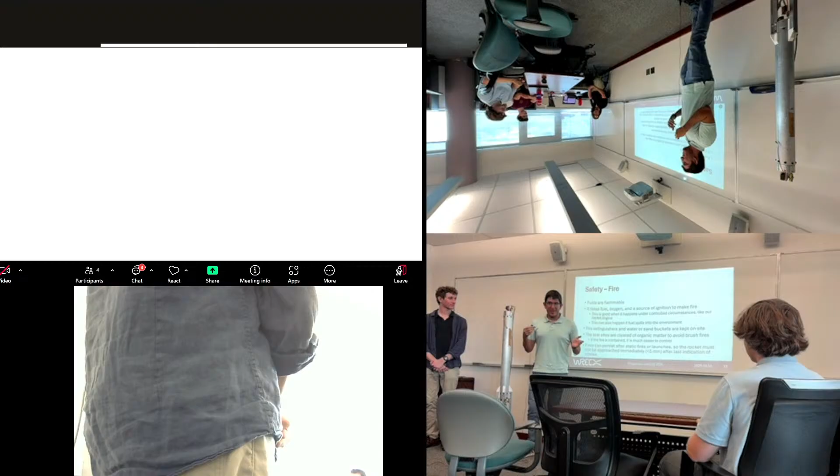Fires. Fires are really scary. Don't want to burn anyone. And we also work with oxidizers and fuels. They will combust by the fire. Hence why we're always staying away.

On site, we'll always have water and fire extinguishers. We'll never do any sort of testing without these two, and they have to be easily accessible. So before we start a static fire, we have our SOP, our standard operating procedure, on who's going to be in charge of dealing with the fire extinguishers and the water. And on top of that, every single member who is at the static fire will know how to use this equipment just in case the person who is in charge of it isn't able to for some reason.

All right, nitrous oxide. We can't have oxidizers near fires. Oxidizer and fuels, not a good combo. Kind of builds off of the last one.

So that's just more information about why nitrous oxide is dangerous. I'm pretty sure most of us in here are familiar with the concept.

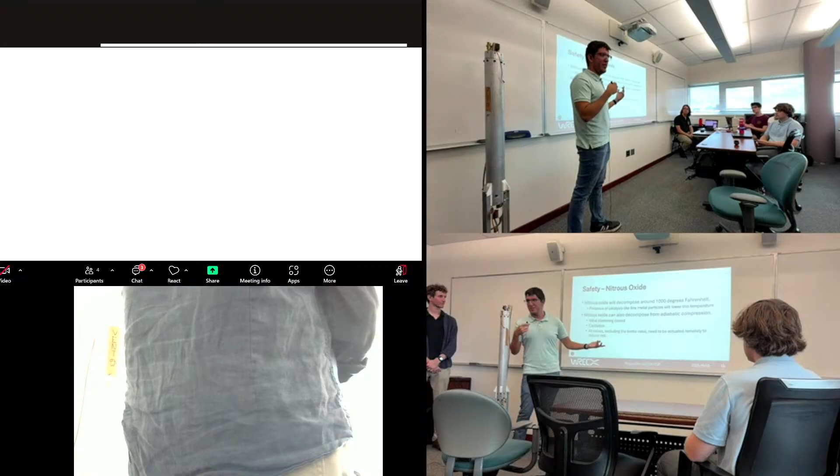Cool. So, BLEVEs, boiling liquid expanding vapor explosions. It's not the highest risk with our system, but it's still risk we want to take into consideration. We are a laboratory. It is dangerous by nature.

Cool. Fuel air explosions. This is caused when fuel vaporizes into an appropriate volume of air, reaches an explosive threshold and gets ignited. We need to prevent this at all costs. So that's why we actually have a new position called the safety lead.

The safety lead is actually in this room. His name is Sam. He's in the back. He was just elected today, so he wasn't put into the slides. But the safety lead's position, he's making sure that whenever we're doing a static fire, that the people in charge are doing the right things. So while let's say Chris is trying to ignite the rocket, he's going to have his own separate checklist that is exactly identical to his, making sure he's not skipping through all these things. Because we need everything flowing as it should, when it should.

Electrical hazards. Just like with anything nowadays, there's wires, electricity's flying through it. We need to be really careful about this. Electricity can ignite things. You don't want anything prematurely ignited.

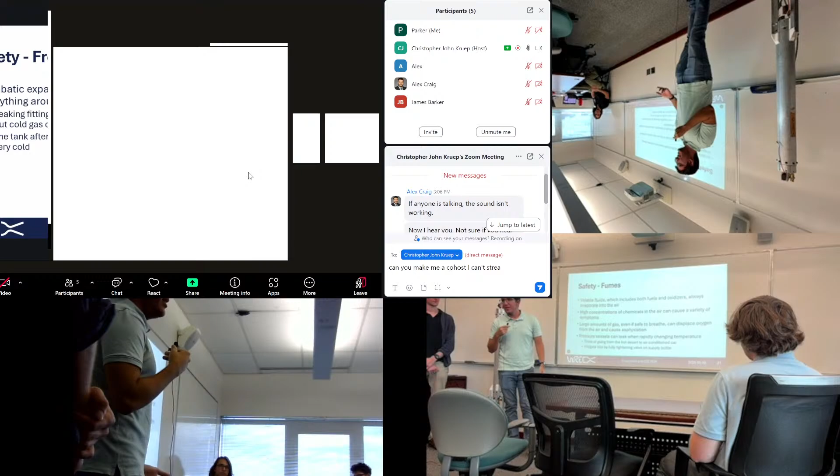Fumes. So for this, we are trying to create an SDS, safety data sheet, on how to deal with all the chemicals within the lab. We want to know that if fumes get into the air, how we're going to evacuate the premises and how to deal with them properly. Since no one in the club is properly certified to deal with fumes, this is why we'll call a certified person, or have someone by who does know how to deal with these chemicals. Any questions about safety?

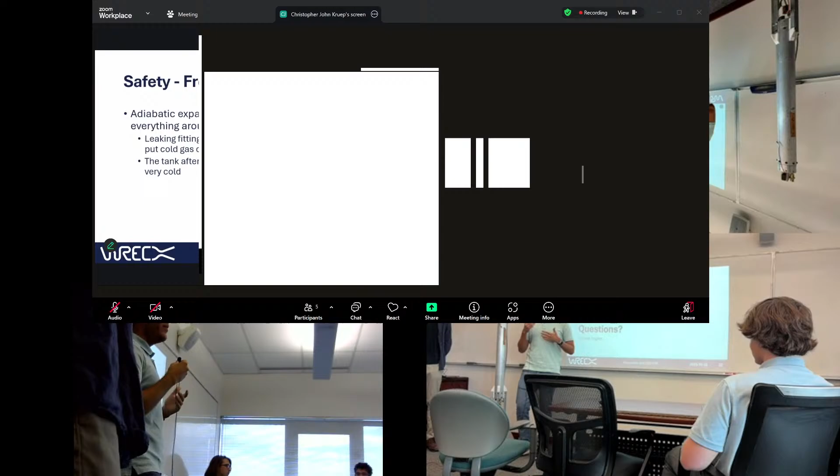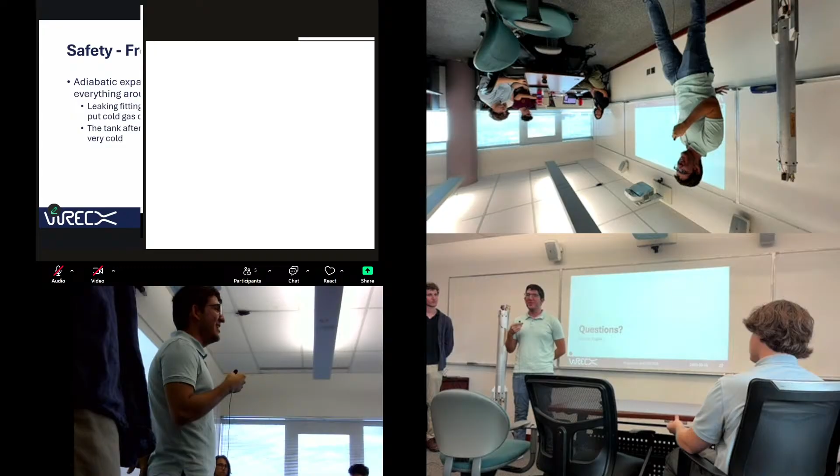Oh, sorry, yeah. So I know it's probably already looked over, so I'm just curious. There's different classes of fires, A, B, C, D. Right? Do you need to know how to identify them? Yes. Most members in the club are actually OSHA certified. Wow. So that's been a real plus. So some people already know how to classify it. And it's also something I'm planning to teach at a future general body meeting, probably the next one. Like you said, fire classification is really important.

I'm not sure, honestly, but it could be started in January. That would be interesting. I know they have that. And also the competition in May. In January, yeah, because that's supposed to be our first static fire. You're going to the symposium in January. Yeah. I'm not quite sure on the static fire, but I'm pretty sure we can figure out more stuff. Okay, and then we could talk more about that.

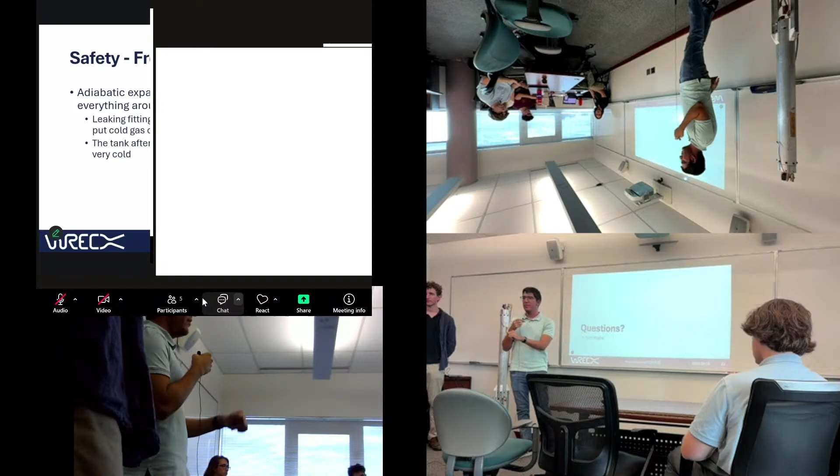Do you guys have any safety certifications you give to students? Like, are there any courses? So we don't currently have our own safety certifications, but that's something I was trying to look into. Maybe try to get more people certified in OSHA 10 since it's a relatively easy thing to do. But that's something I want to work with the U of A on to figure out how to get a bit more efficient. But right now, we're figuring out this whole safety thing since it's a brand new position.

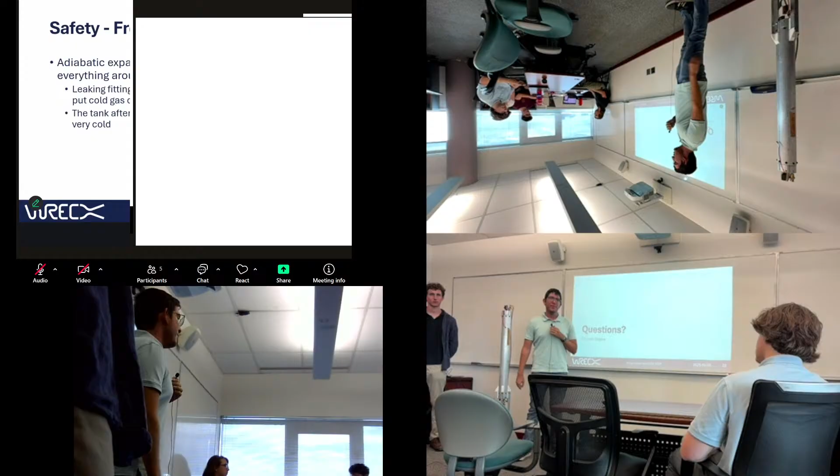Can you describe a little more of the electric match? So yeah, E-matches, that's how we ignite the rocket. Just in case that short circuits, it might go off. So how does it actually work? What I'm getting at is, do you need certification just for that? So the E-match is a very small pyrotechnic device, about this big. To ignite it requires in the range of hundreds of milliamps current, very small. You can even use 5 or 9 volts to do so. When it does ignite, it's just a small pop. It is technically not safe to be super close to, but it's very small and contained.

They're used to ignite typically much smaller solid rocket motors, and the same ignition system will be used in this rocket, more on it later. Very small, and that'll be in here. So when we're handling those, we keep the end leads shunted so that any static that builds up as we're working in the heat in the desert, wherever we are, will not go through those leads to ignite them, because with that low current, they can be sensitive. Otherwise, they have protective little coatings on them, and we keep them in a secure box while in our club area, to mitigate risk.

Good. I was hoping you'd refer to grounding and shunting, things like that. So do you have to take special training in order to handle those? As of this moment, no. You can just buy them online, and they just get shipped. Is there a class that helps, like when an organization classifies them? In my knowledge, no. I haven't seen any classes on it, because you can kind of just buy E-matches anywhere. We get ours off of Amazon and CS Rocketry. I think it's because they're very small. I've seen higher classes for bigger solid motors, but even the little solid motor we put in there is not classed as an explosive for transport. Well, would you consider this the first rocket and the second rocket that we've had over the years?

Is this the first? Yes. The Sonoran Wildcat, first rocket, these are the same thing that you see right here. And then you're just gonna completely start off, because I know the rocket has to come back down and slam on the ground. For recovery or for the whole structure? Not for the whole structure, but whenever we launch, we have to bring it back down and land it. Are you gonna set up the landing platform from scratch, or do you have a plan for it?

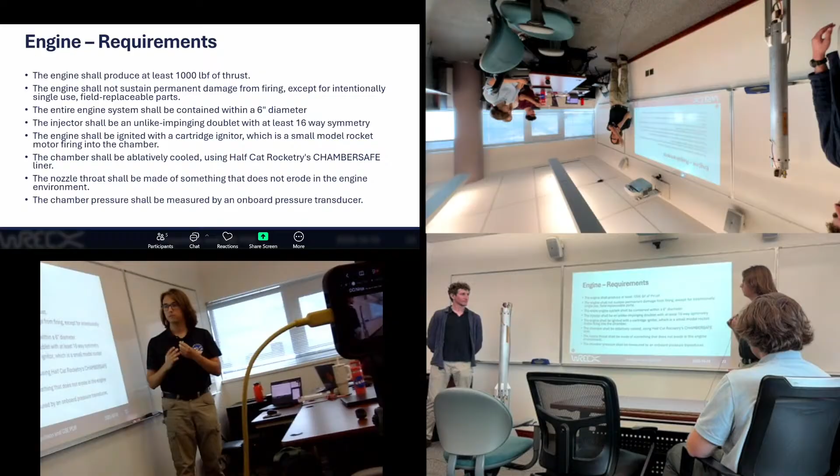Hello, I'm back. Okay, so now we're into the subsystems. As you can tell, they get progressively shorter as the slides go on, but we're starting with the engine, arguably the most important part of the rocket. These are the list of requirements. I'm not going to go through all of these, but I'll go through a couple to explain them. A very important one: the engine shall not sustain permanent damage from firing. We want this rocket to be mostly reusable. There are some exceptions. Ablative liners are the big one because it's the simplest way to make sure the engine doesn't melt by sacrificing some material.

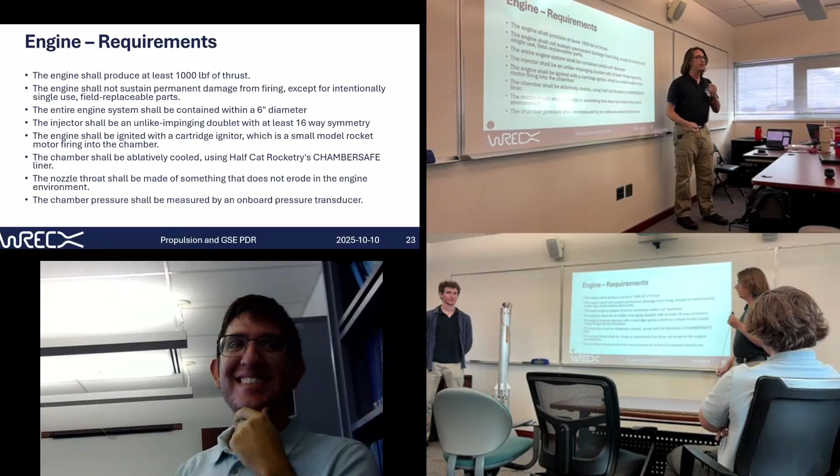Let's see. The nozzle throat will be something that doesn't erode. This is key for how we measure thrust. As of right now, we don't measure thrust with a force sensor, we measure thrust with chamber pressure. And this is good provided you know the right parameters of the engine. One of those parameters is the throat area. If the throat area is changing, then you have a much harder time getting an accurate thrust profile. We'll get into this later, we're looking at either graphite or some kind of alternative. Let's see one more.

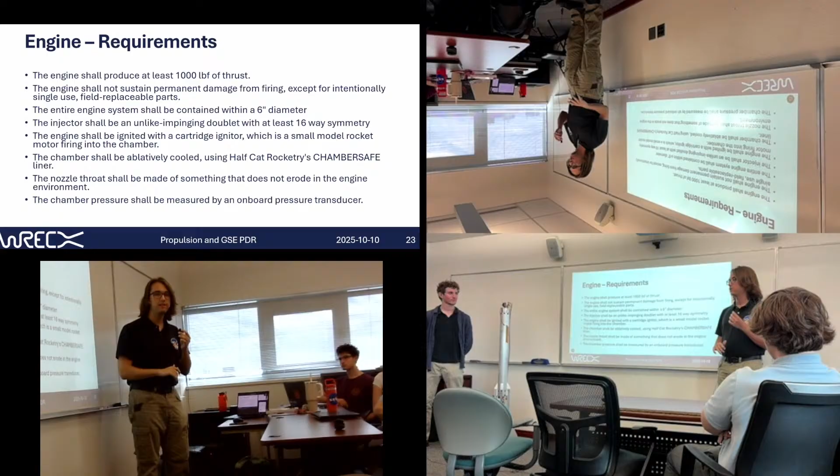The entire engine system needs to fit within a 6-inch diameter. This 6 inches is the diameter we're setting for the rocket. And we need to make sure that nothing sticks out of 6 inches because it will cause challenges for integration and drag in flight.

Okay, so a little overview of the engine.

You can't see this very well. Oh, I'm sorry about that. Oh, actually, could somebody hit the lights? That might help. Yeah. Not much better. That did not. You can turn that back.

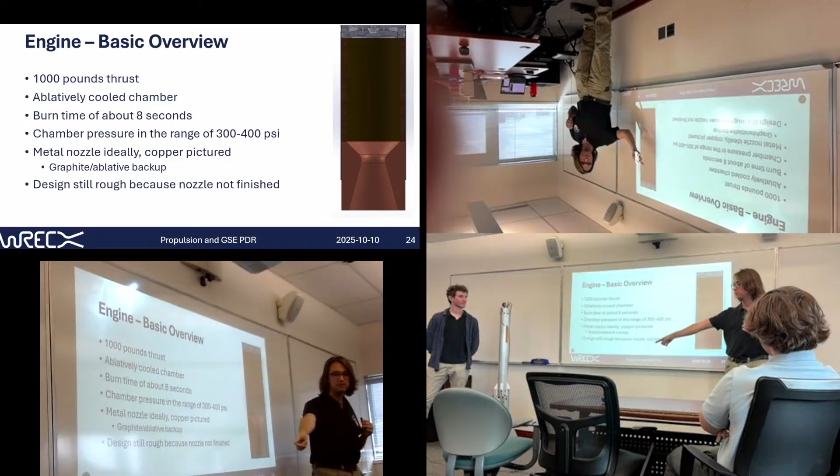So 1,000 pounds of thrust. Again, that's about 4 times what this makes. It's technically higher than it needs to be, but we like a good margin. Ablatively cooled. If you could see this, you would see that there's a tube made of ablative, and it's about 0.4 inches thick, which is quite conservative for our length of burn. Burns for about 8 seconds, but it might burn for less than that if it burns higher thrust. We'll get into that later.

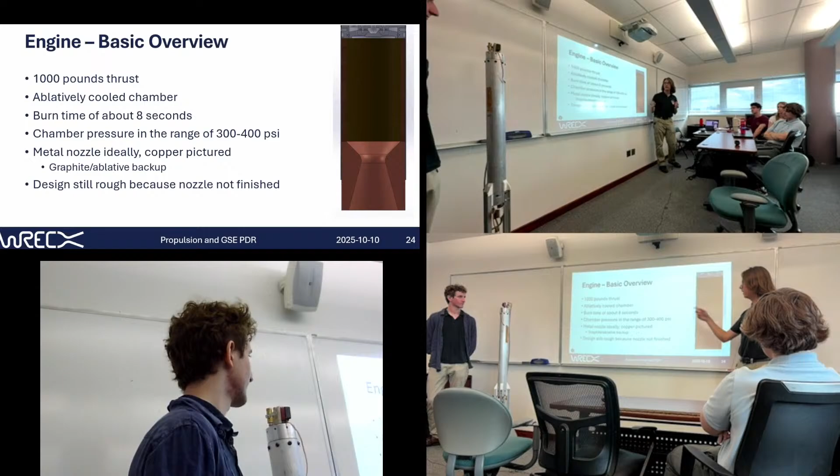Chamber pressure about 300 to 400 psi. This is sort of limited by the properties of nitrous oxide. You can only get so much pressure into the chamber based off of the vapor curve and everything. Ideally, a metal nozzle. We'll get into that later. And of course, this is a rough design. The most finished part is the injector, I would say.

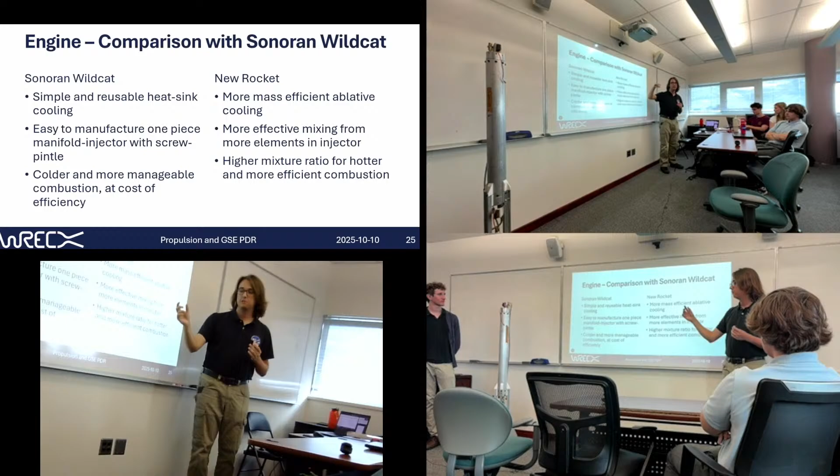So comparing the two, on Sonoran Wildcat, we used a heat sink cooled engine, which means the chamber wall is 1/2 inch thick. And that is simple, it's very reusable, as long as you design it right. But the catch is it cannot burn for longer than it's designed because then it will get hot enough to melt. Heat sink means it just absorbs the heat and distributes it evenly.

On the new rocket, it will be ablative cooling, which is burning away material to take heat with it. So it's not reusable. On this rocket, it was a simple manifold injector combination with a screw pintle injector. It's easy to manufacture, it works pretty well. The new rocket, we're hoping to get a little bit more efficient mixing from an impinging injector with higher symmetry. This rocket burned very cold in the engine as far as rockets go. The new rocket will burn hotter, but hopefully also higher efficiency to get more performance.

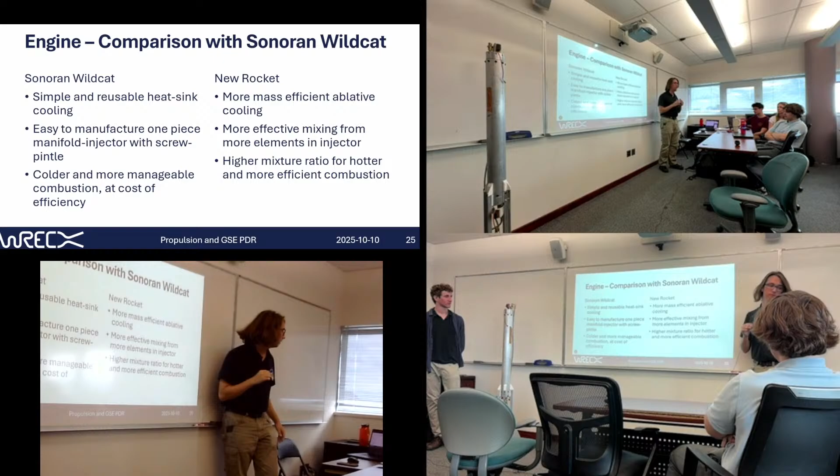So some numbers to back that up. We've already covered this. The throat diameter, you can see it's almost double on the new rocket. The specific impulse might be higher. We've tested to 140 seconds. Specific impulse is a measure of efficiency. On this rocket, that was the highest we ever got. The simulations say 160 seconds, but I'm skeptical. But that's okay. That's why we tested it. Chamber temperature, big difference, 1400 degrees Fahrenheit versus 2600 degrees Fahrenheit.

That's exactly, no way, you can't say that. Never mind, I was gonna say it's twisted, but it's not.

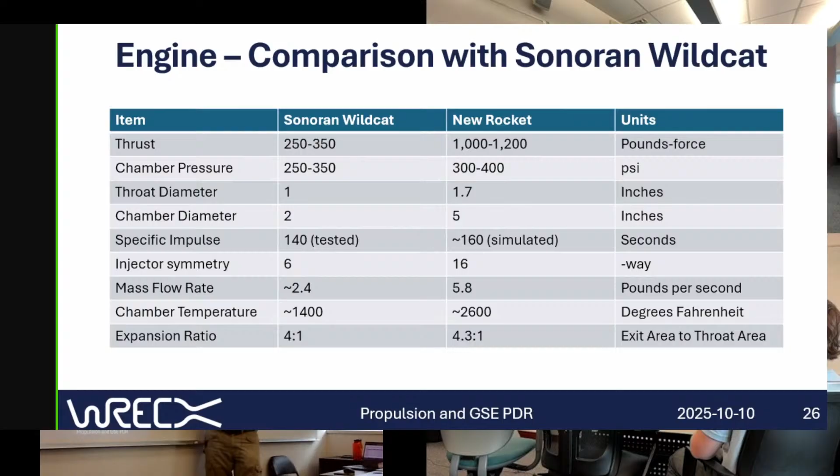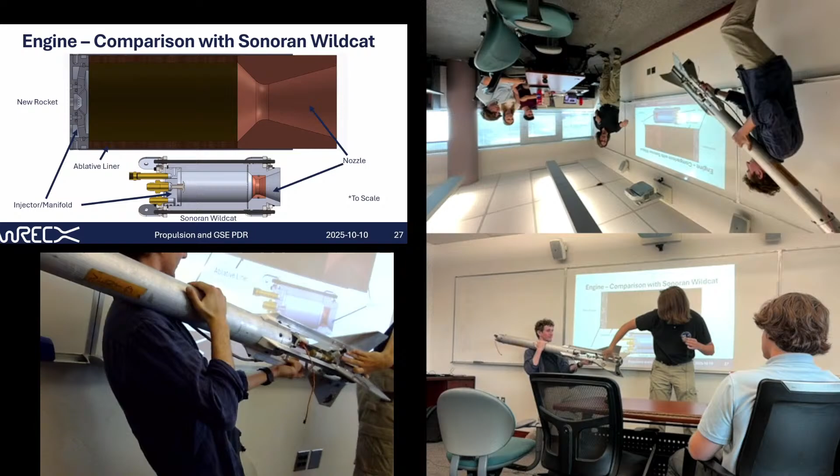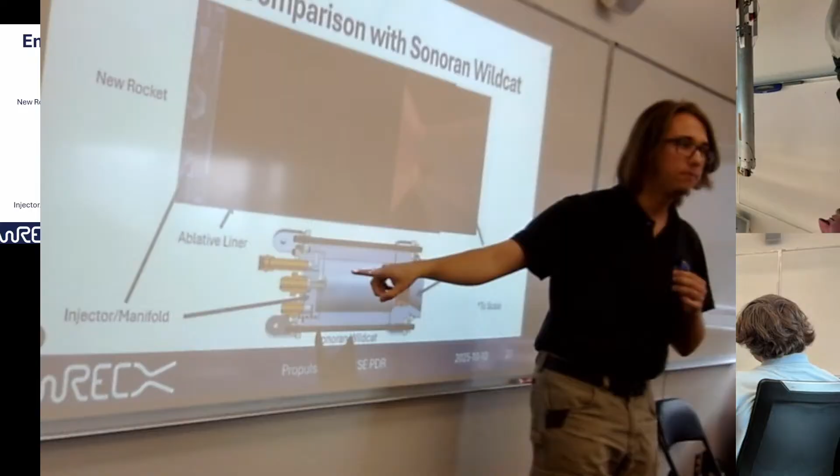Here's a size comparison of the two engines. I think this is quite illustrative. You can see the engine down there. Well, maybe you can see it later. It's among the fins, but it's this right here. That's what this is. And so this has got a copper throat as well and an aluminum liner. This was modeled as an all copper throat, but our preliminary simulations say that's not necessary at all. Chamber, it's bigger in every dimension. And then this is the pintle injector we were talking about, and that's going to be the new injector, which we're going to talk about in detail now.

So this is not a pintle injector. This is an impinging injector. It takes fuel in the center. The reason for that is because the fuel tank is at the center, so it's more convenient. And then it takes oxidizer in through here, and it goes in this annulus around to distribute to all of the holes. These are the holes that shoot the fuel in. These are the holes that shoot the oxidizer in. You can see they're both angled so that they will meet and impinge, as the name suggests.

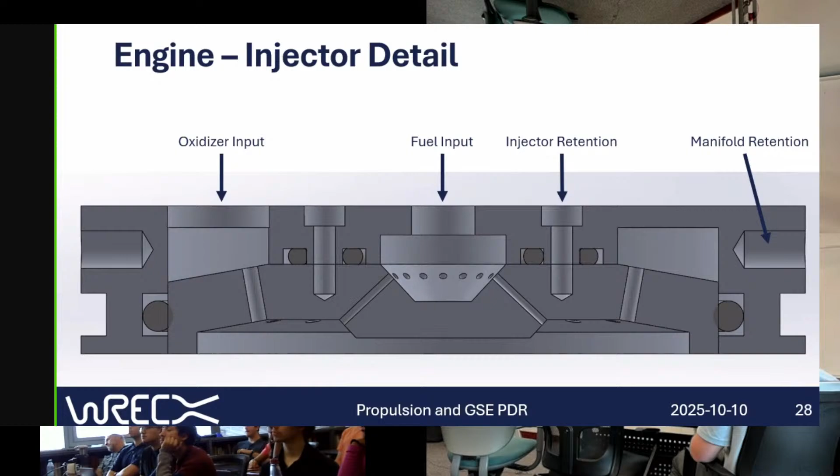It's got bolts, it's got the injector plate as a separate feature from the manifold, which allows the injector to be replaced if it turns out our models were wrong on the injector hole sizing. You can also see how the oxidizer is much bigger than the fuel because our oxidizer to fuel ratio is about 4. That's for mass, this is for volume, but it's pretty close.

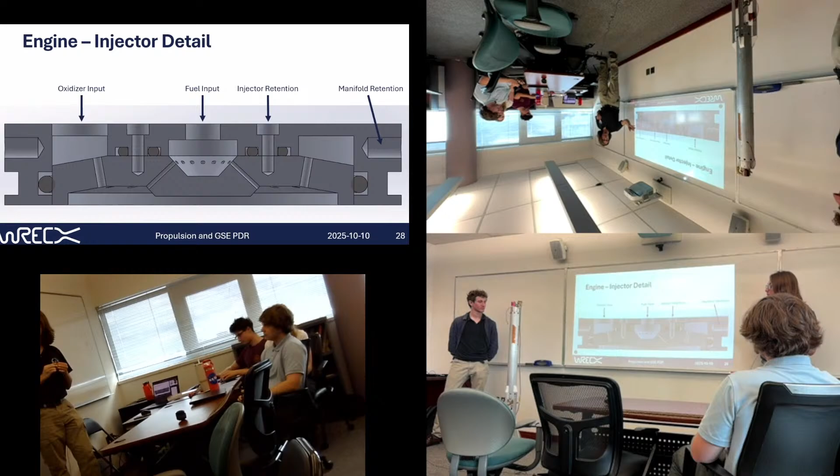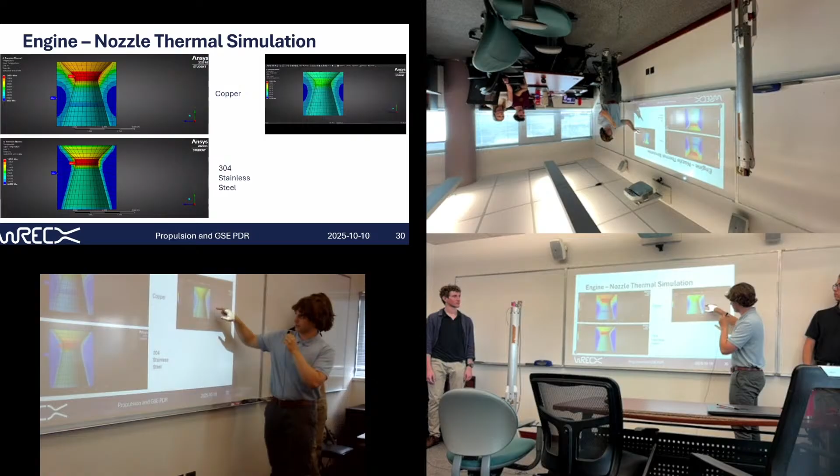So this here is copper, and this is at second 8, and you can see the temperature propagated out much farther in the nozzle. And this is stainless steel, which we're kind of leaning towards at the moment. And you can see there's a lot more effective burn in there. This is a really cool simulation of the thermals of the copper. So right here it started at second 0, and then as it goes, you can see the throat heats up quite a bit, all the way up to, I believe, 1600 degrees Fahrenheit.

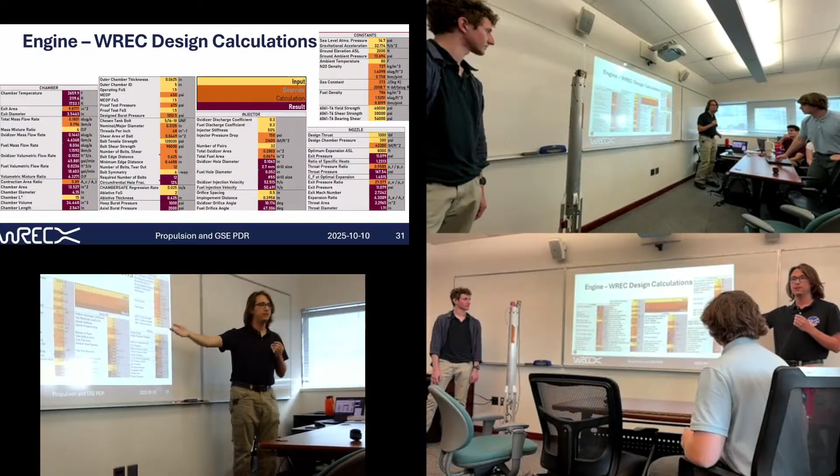Okay, this next slide is sort of illustrative. I don't have any specific numbers to point to, but if you want to take a look at the slides either before now or after now, these are the numbers that we calculated. We've already talked about all the important ones, so there's not too much to say on them.

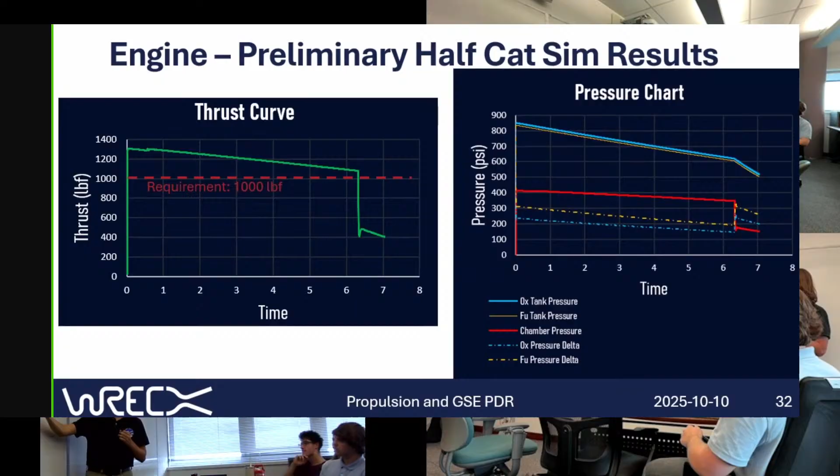So these are the preliminary Half-Cat Sim results for our new engine. Half-Cat Sim is a rocket engine simulator written in Excel. It's kind of glorious, if I would say so myself. And you basically get to put in all of the physical parameters of the rocket, like how big is the tank, what are the injector holes shaped like, and then it comes out with these graphs of thrust curve and pressure chart. And the pressures, it just sort of shows you what pressures we're dealing with in the tank and the chamber. And then the thrust curve is the thrust versus time.

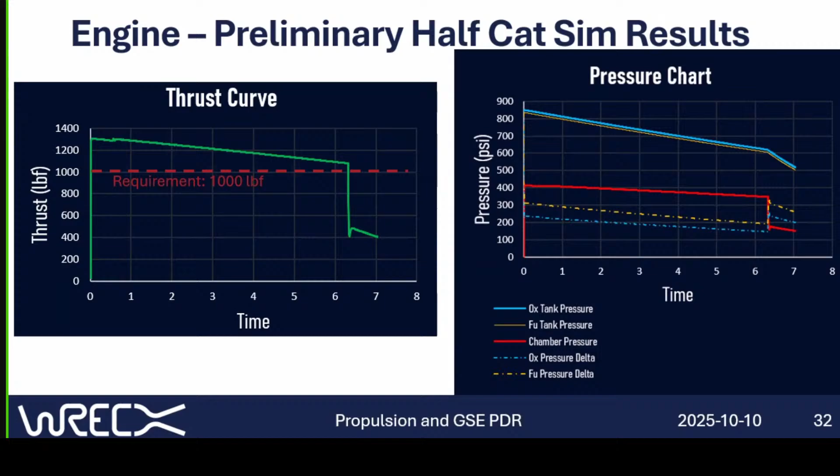So you can see it goes out to 8 seconds. You can see the simulation suggests that the burn is higher than expected. It's about 1300 PSI or 1300 pounds, and it burns for shorter, which would make sense. A higher burn, shorter time. This dashed line is our 1,000 pound burn. And what that suggests is that our models for the pressure drop across the feed system are conservative. Relax it a little bit.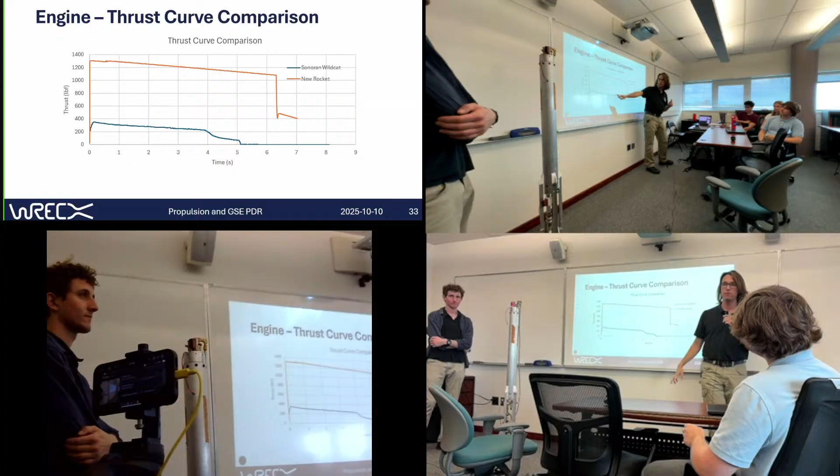So this is a comparison of the two thrust curves. In orange, we have the new rocket all the way up here. And this in blue is the test data we have from our 4th successful, I don't know, it's our most recent static fire. And you can see the new rocket, it burns for longer and it is higher thrust. Overall, much more advanced. Okay, questions?

This is a big topic, yeah. I have just about the bell. You showed that you were preferring stainless steel versus copper. Copper had, I don't know the proper terminology, but it had like that heat gradient pull off of the bell, and you preferred the stainless steel with a smaller gradient, closer to the skirt of the bell? Why is that necessarily better? How does that affect?

So, that's a very good question. I'm glad you asked that. It's not necessarily better because of the heat gradient, but what the stainless results showed us right away is that we could, in principle, in quotes, cut out most of the mass of the nozzle because most of it stayed ambient temperature. And so we can make the nozzle much lighter, and that's good for the rocket.

With the copper, that might theoretically be possible too, but stainless is also in general cheaper. So if we had to choose between the two, we always got to balance mass versus cost. And we like things to be cheap because we don't want to run out of money. Cost plus manufacturability as well. Mm-hmm. Especially when considering graphite.

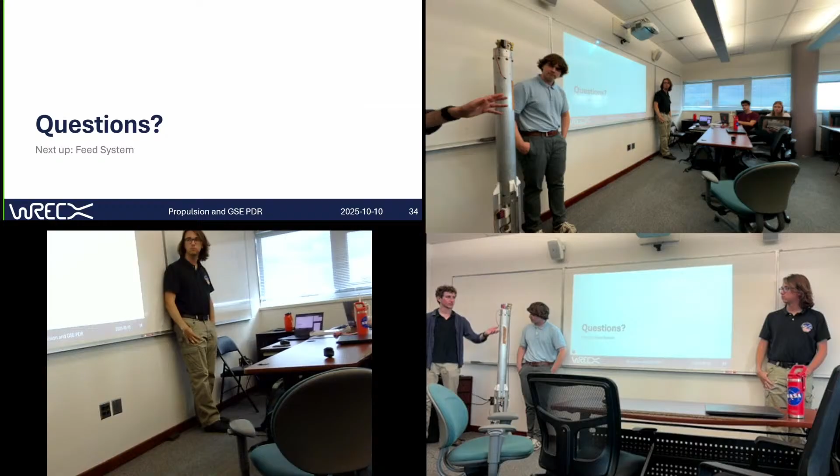Yeah, this rocket is by the book. Literally, there is a book about how to build this rocket. And for the most part, we followed it. We changed things where we felt like it, including adding stuff for safety. But for the new rocket, we're making all the design decisions based off of principles, but no specific numbers.

So for the length, are you considering changing it for the new rocket? Say it was like, don't worry about the budget. Would you want it to be bigger or keep it the same size? I think your question will be answered not in the next section, but the section after. Okay.

So I'm assuming the end is gonna get really hot with this whole system. Are you worried about the metal morphing or expanding too much? Do you have a cooling system of any kind? Well, yeah, the heat is the big thing we are concerned about. The cooling is the ablative, but it's also just allowing the heat to soak in. We have to save a lot of complexity and weight.

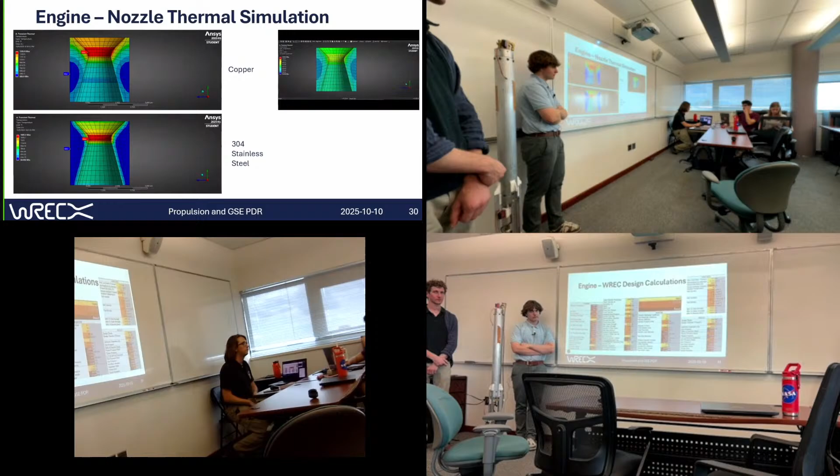Can you bring up the numbers slide, the spreadsheet? Oh yes, I was looking at this earlier. And while you bring it up, main question, in direct relation to the spreadsheet: what thermochemistry software do you use?

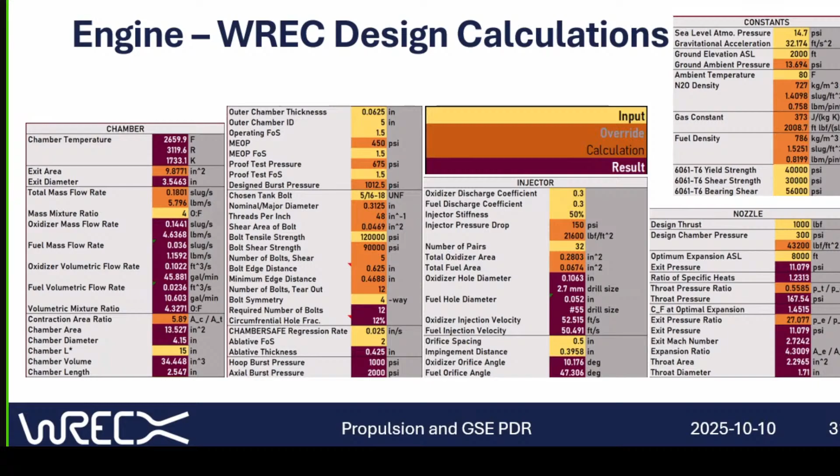Half-Cat Sim does thermochemistry itself, specific to nitrous oxide and a selection of fuels. It is well anchored in real fired engines, the sim is not just in a vacuum, it's calibrated with a bunch of other engine data. Right now I have this set up feeding between Half-Cat Sim and the design spreadsheet to get the right thermochem value. It's also checked with NASA CEA, and I tried using RPA, with my free trial.

It's good to know you're checking this with NASA CEA, because what immediately stood out is you have a 4-to-1 mass mix ratio. That's very close to stoich. And your predicted chamber temperature is 1700 Kelvin, which is very low. It comes from the additional poor mixing efficiency assumption, that's not the ideal chamber temperature.

That's with some efficiency factors just slapped on there to account for the fact that most of these style of engines don't perform ideally at all. What is it using to determine the efficiency factors? Because you've also decided in this design to go for a like-on-like impinging injector, which is going to greatly increase your atomization.

The reason I'm worried about this is because you were already concerned about thermal issues with the nozzle, and that's with the predicted chamber temperature of only 1700 Kelvin. Off the top of my head, that's at least 1000 Kelvin below what you should be expecting with the 4-to-1 ratio.

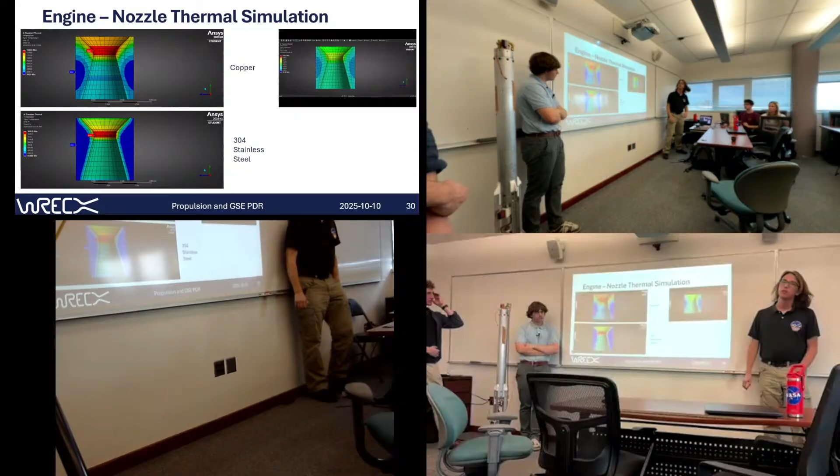Because as we're getting to, if you can go to the WREC calculations, go fast. The nozzles, yes.

It's not great already, like when we're talking about stainless steel, it's true, it's like 1700 degrees Fahrenheit. That is close, and that's close with your lower combustion temperature, and that's with a solid stainless steel nozzle.

So I want you to consider the fact that you seem to have converged on one metal nozzle selection, but I think you think you're being conservative from a design standpoint by assuming lower efficiency combustion, which is true when talking about performance, but not when talking about thermal efficiency. I think you should be assuming you're going to combust at close to high efficiency, especially because I saw you made the chamber length long enough to allow for full combustion efficiency, and you're still assuming it's going to be much colder. I think that's a potentially dangerous assumption.

The other thing I wanted to point out is you mentioned you could reduce the amount of metal based on these assumptions. However, metal conducts a lot of heat, and I would posit that even the cold parts, the blue areas in the simulation, are still carrying large amounts of heat away from the hot surface. So I don't think you can say, if we go through portions of steel, we get rid of the blue section, and the rest of the heat profile stays the same. I think you cannot make that assumption; you'll need to test it to figure it out.

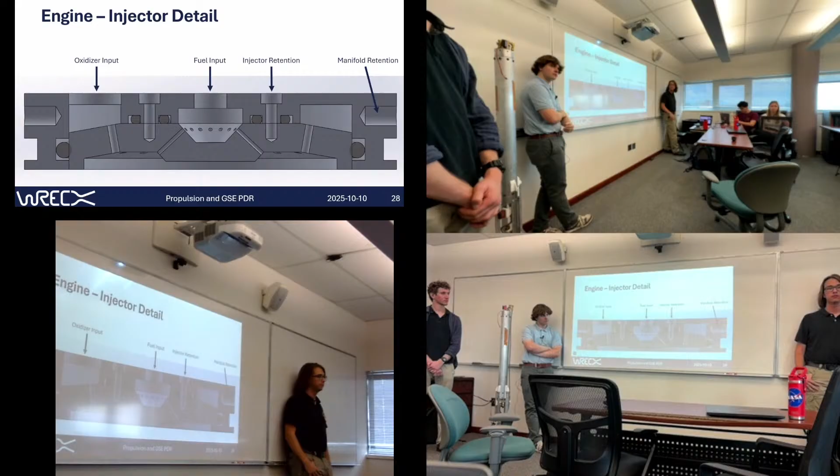So I was trying to figure out why everyone puts fuel on the outside. Yes, and that answers it. And there's another reason why they might do that.

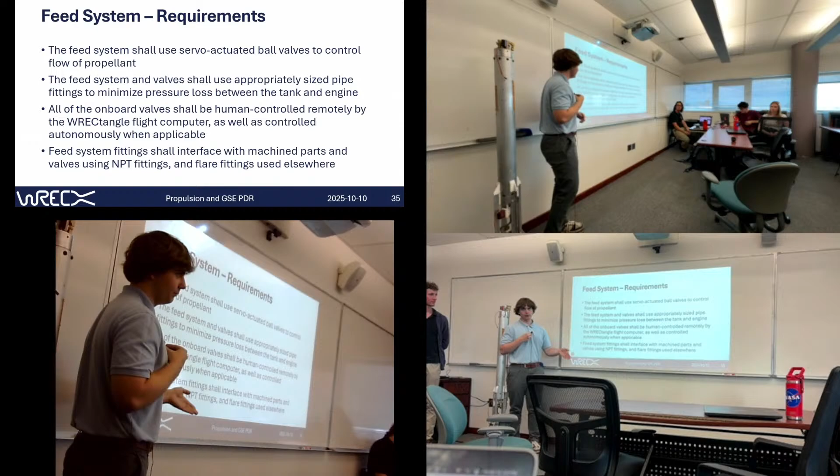Feed system. So we're really using servo actuated ball valves for all of ours, as opposed to solenoid valves, which are more expensive, have a lower mass flow rate, and take up a lot more space. And with the oxidizer having a much higher mass flow rate, we're increasing the size of our ball valves for that portion of the rocket. All of our onboard valves will be controlled by the WRECtangle, which we'll mention more later in the presentation - that's our flight computer.

So these are the valves from our old rocket. These are 1/4 inch ball valves. And for our new oxidizer valve, this is the preliminary design. But after further testing of the ball valve, another actuator assembly will be needed, which is currently under development. It needs to be 1/2 inch instead of 1/4 inch because of the high mass flow rate.

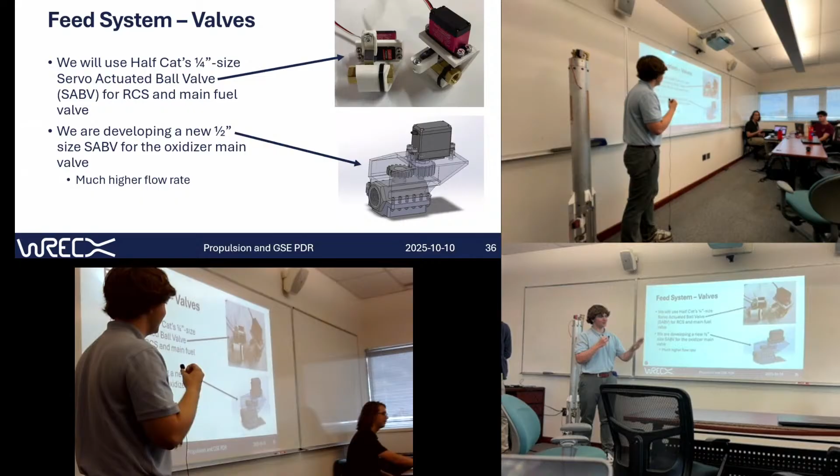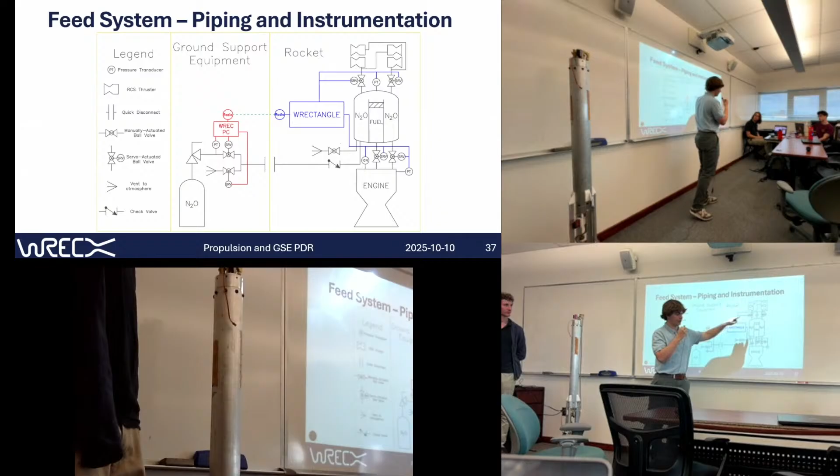This is a SketchUp of our RCS system, controlled by two servo-controlled valves, which will counteract RCS thrusters like this. We have our oxidizer here, and our igniter here with a pressure transducer directed right into the combustion chamber, next to the igniter, unlike the previous point on this rocket.

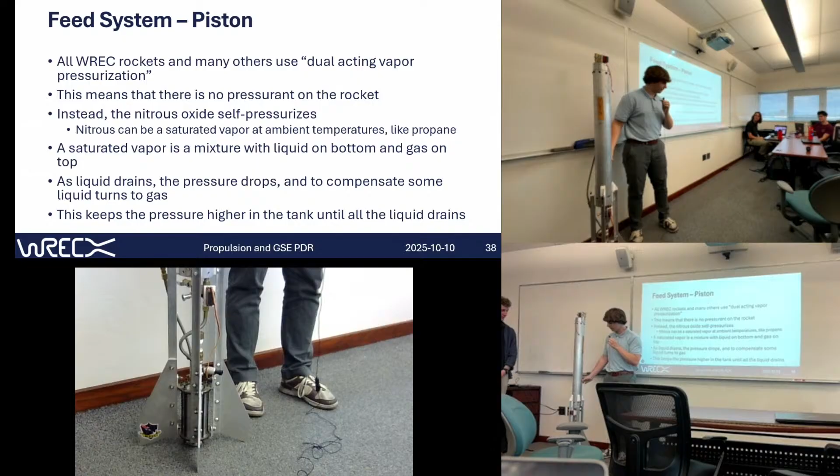The nitrous is self-pressurizing, meaning we don't need a fuel pump. With our tank design, we have the nitrous oxide at the bottom and the fuel at the top. There's a piston where the nitrous oxide evaporates and creates positive pressure, pushing that piston up. It has dual O-rings and forces the fuel out the top, through a ball valve, directed back into the engine.

The biggest thing is we really do not want the oxidizer and fuel to mix inside the tank. So while it sounds a little sketchy, it's just a piston with two O-rings that moves up and down as the fuel drains, maintaining a positive stable pressure at the bottom.

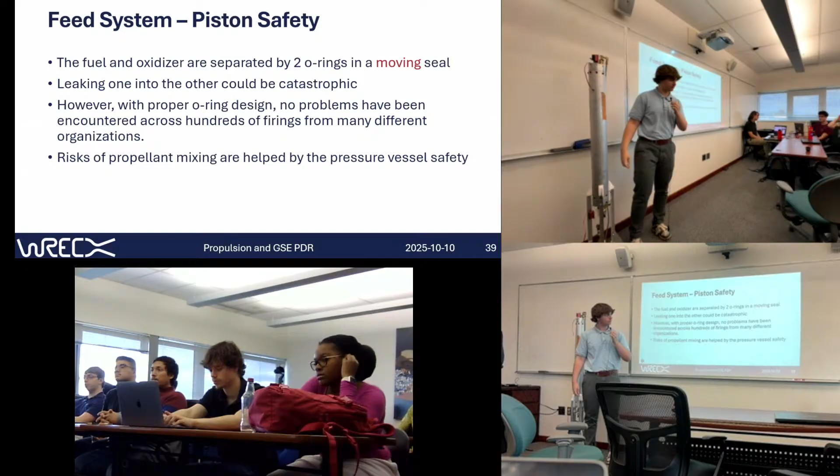This is a good illustration. This is before fill. We'll fill the fuel before launch, and before we get to the pad, we'll fuel the nitrous oxide, compressing the piston. As we fire, the nitrous oxide will drain, positive pressure will be maintained, and the fuel will go out. When firing, we'll have entirely gaseous nitrous.

Any questions? For the piston, does it need any lubrication? It's designed so that for a moving piston seal, the metal wall of the piston is set in from the metal wall of the tank, leaving a gap that's filled by the fuel.

So no lubricant, so nothing touches that could react with the oxidizer. There is a small amount of grease, but not much, so it doesn't ignite or mix with the oxidizer as it travels. It's not made from fuels.

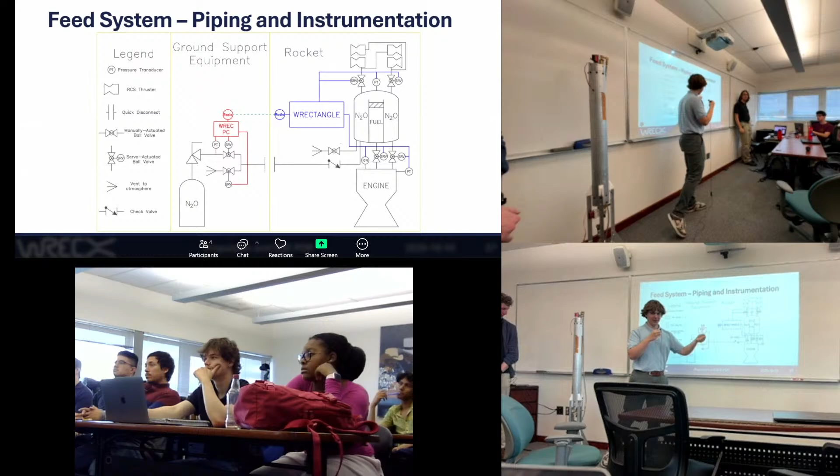Anything else? What's your solution if you lose contact with the rocket, regarding the pressure? We have a manual control valve for that, shown early as a safety feature. There's just a string you pull and that works. It's a very long string, and pulling it causes the valve to open.

The prior rocket had a static vent that would always be venting nitrous. The current rocket aims to maintain more nitrous in the tank, so we are ditching the static vent but keeping the manual dump valve in case of a valve or electronics failure. We'll use the RCS thrusters as additional vents, since right now there's just a small hole for the nitrous oxide.

So if something goes wrong while setting up on the launch pad, you just dump it? Correct. Assuming we are off the launch pad, something has probably gone right, and we are probably already venting the valve.

We'll get into that more in the RCS section. Just to be clear, there is a radio link between the PC on the ground and the rocket in flight for data acquisition and things of that nature. We'll have more on that later. Any other questions?

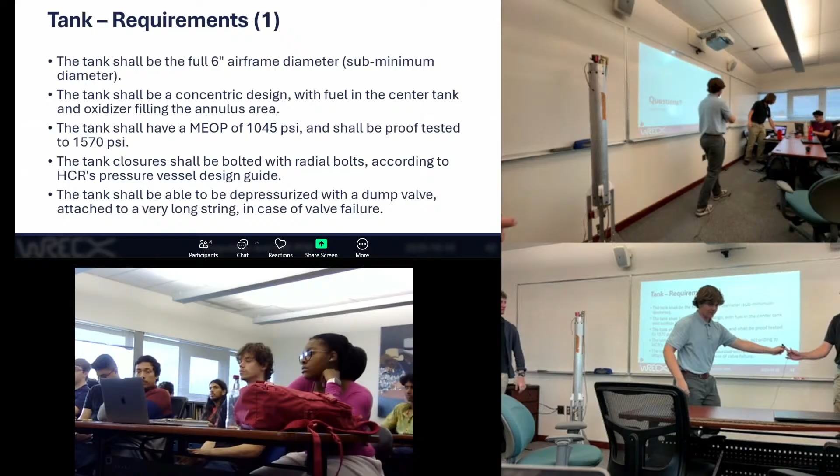Up next is tank. All right, I guess I'll get to that tank. So the tank is what holds the propellant. We're going to make the tank 6 inches in diameter, and that will be considered sub-minimum diameter. Like this rocket, the tank is the outer wall. There's nothing protecting the tank from the airstream. The tank will be concentric, which we have some good illustrations to get into later.

The tank operating pressure will be 1045 psi, which is an important number. That's the critical point. I was going to call it the triple point. It's not that. It's the critical point of nitrous oxide. So, meaning if we exceed 1045, then that means we have to stop and vent the tank. Abort. Yeah.

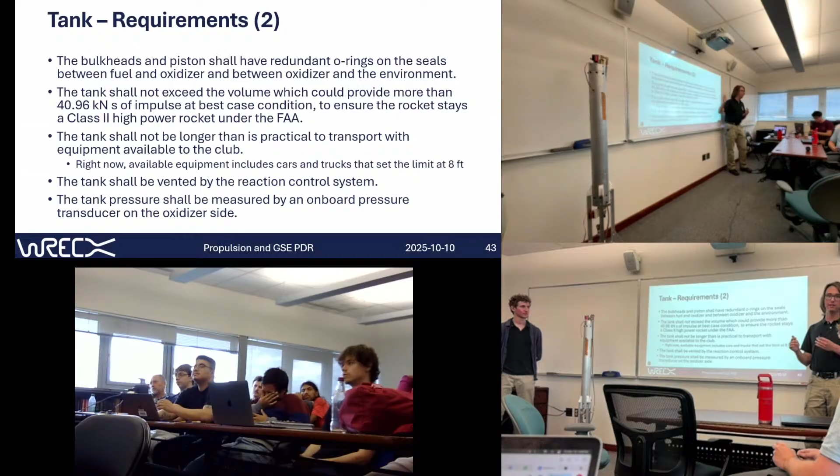We'll have a radial bolted tank, just like this is. You see the black bolts holding the bulkheads on. And as we talked about, it'll have a dump valve present. And we have more requirements. Redundant O-rings kind of goes without saying. If one O-ring failed, we'll still have a backup. This is a big one.

The tank will not be bigger than what could provide the impulse under best case scenario for more than 40.96 kilonewton seconds, which ultimately means we want to keep this rocket legally classed as class 2. If it goes above that number, it's class 3. And if we go over that without knowing, it's a huge amount of paperwork. If we go over that intentionally, it's just a lot of paperwork. And so we want to stay well out of that.

So that's our limit. An additional practical limit, the tank cannot be longer than we can transport. Right now, that's an 8-foot limit of the longest car/truck bed we have available to us. Yep. So here's some more comparisons. They're the same thickness, 0.125, that's 1/8 of an inch. And that does mean a lower burst pressure, but it's still more than double the MEOP. So it is okay under FAR

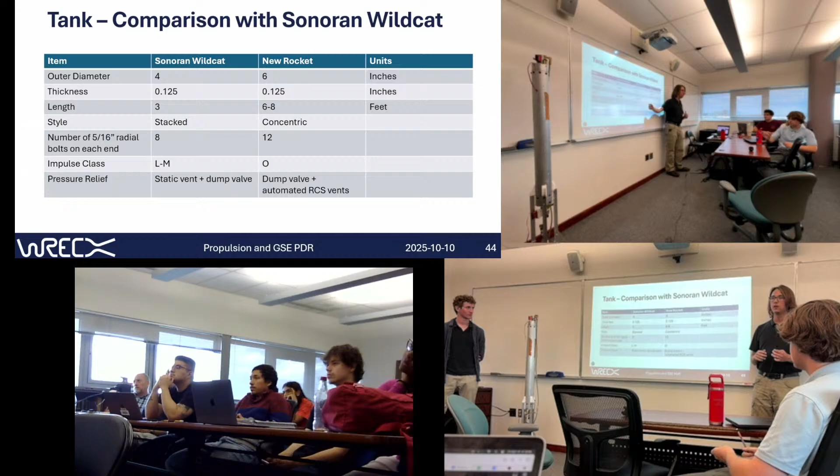rules. Then we have obviously the concentric tank, which we're getting into. We'll need to have more radial bolts, but it's a bigger tank. There's more force on the bulkheads pushing them out. Impulse class about O. We're definitely not going higher than that. So what is a concentric tank? The Sonoran Wildcat uses stacked tanks, where the fuel sits on top, the oxidizer sits on the bottom, and the piston sits in between. The piston moves upward during the firing.

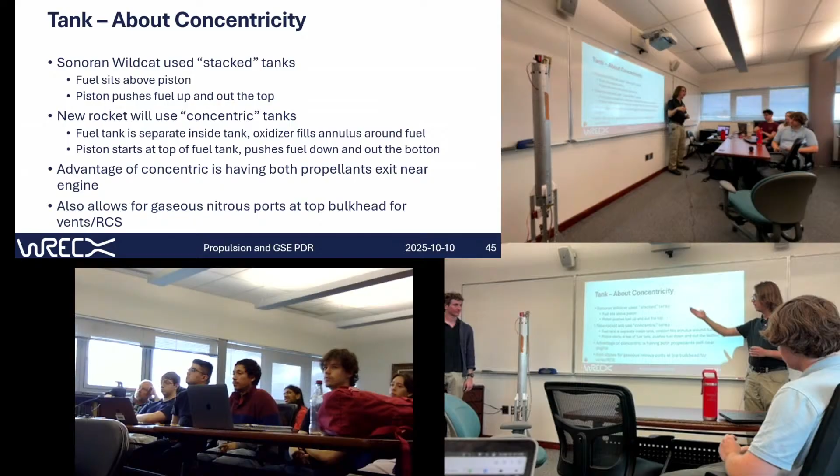What we're going to do is concentric tanks, where there's the main tank wall that holds the pressure, so the outside. Inside is a smaller, non-pressure bearing tank, minus maybe a few dozen PSI. That holds the fuel in the middle, the oxidizer in the annular region around it. The piston starts at the top of the fuel tank, which is also the top of the entire tank, and it moves down with flight. So the main advantage is that both the fuel and the oxidizer come out at the bottom of the rocket, which is where the engine is. And we have gaseous nitrous available at the top of the rocket, which is where the vents will be.

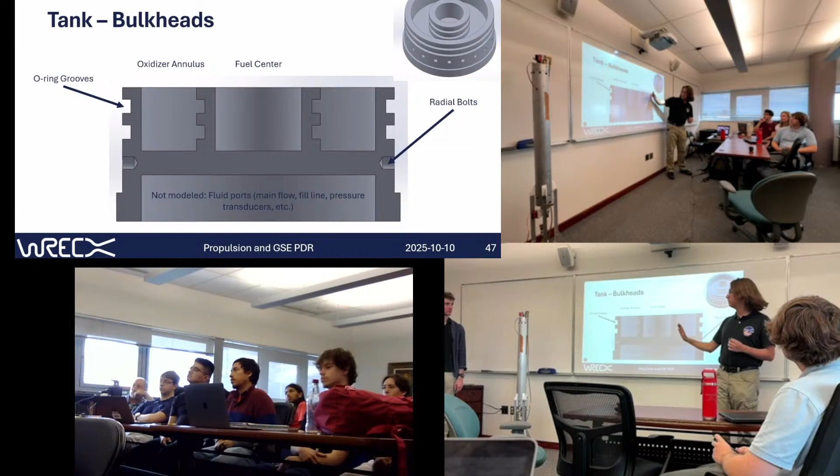Bulkheads, these are a more preliminary design, but the general idea is here. There are radial bolt holes here. We might decide to move them here and have them go through, but that's a design decision more than anything. We have O-ring grooves, 4 grooves, 2 for the fuel, 2 for the oxidizer, that go all the way around. And the fuel tank, which is not modeled, rests on these O-rings. Then the oxidizer rests around these O-rings. Here we've got more numbers. Okay, moving on. Any questions?

So I'm just curious, is the tank lined with anything on the inside, like some kind of liquid-phobic material? Nope. It's just raw aluminum.

Because I'm trying to figure out what transportation. Can you have any type of transportation, or do you just think like car? Oh, the car is like, if we do make this, what are, so do you have a plan on your transportation? Well, some people have trucks. Some people have trucks with long beds even. Some people also have SUVs or whatever, that we could put it up onto the thingy from the car. Ultimately, it's just up to what you can manage.

University of Tennessee, Knoxville, they were out last year with their rocket titled Big Liquid. And it lived up to the name. It was a class 3 rocket. And this tank was 9 or 10 feet long. And they got around this because they own a trailer. The trailer is more than long enough to carry the tank. So if we had a car that we ran, that would be different. Yeah. If that was not, it's a logistical problem more than anything else.

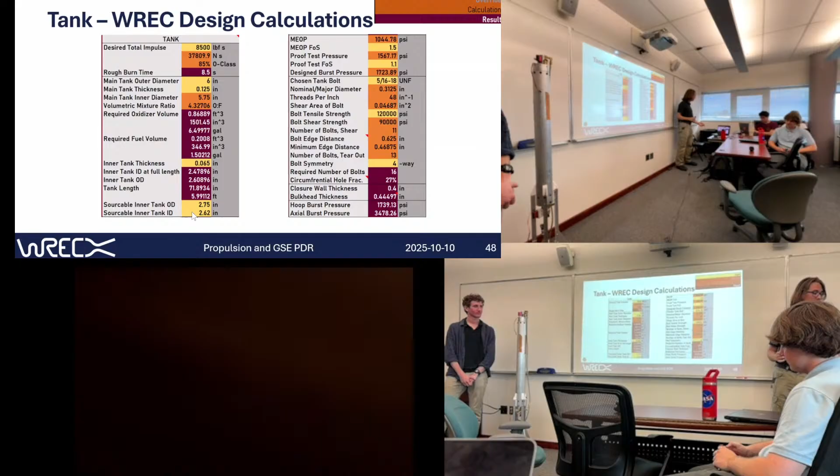We have one from Dr. Gray, and he says, have you explored renting one of the U of A fleet trucks? We have, and it is expensive. It is much cheaper to just use people's cars.

What do you mean by burst test? We'll get into this in the later section, but to test the tanks before we fill them up with propellant, we fill them up with water. The water is incompressible, so we can pressurize it safely to high pressures. And then when it does burst, it won't do so extremely energetically, like it would if it was filled with nitrous, like we talked about a few slides ago.

So we should have factor of safety of the tank in this ratio? That is what it's for. This whole section is what we want it to burst at, and then how many bolts do we need for a shear failure? How many bolts do we need for a tear out failure? Minimum at that pressure.

It's for the concentric tank, correct? So it has, let me see here, main tank and inner tank. The main tank is the one on the outside, and that holds the pressure against ambient as well. On the inside, it is using the nitrous as the pressure. So there shouldn't be a significant delta across the wall of that inner tank. We model about 15 psi, which is atmospheric pressure. Anything else?

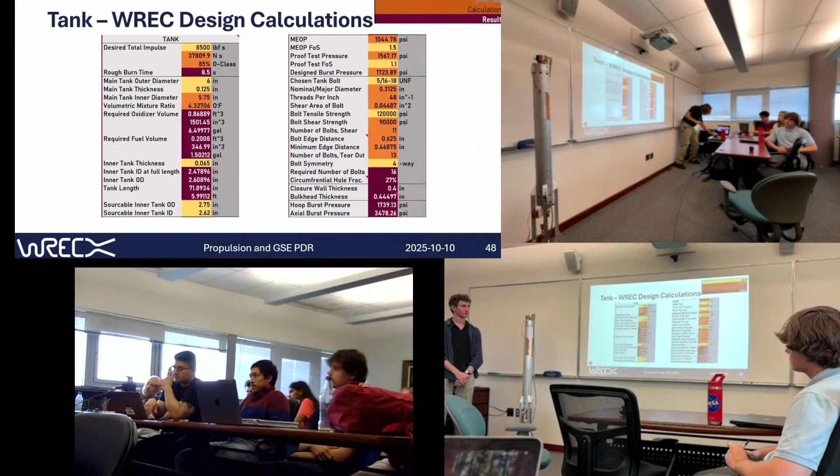Okay. Oh wait, we're on the wrong side. Anything else? Okay. Now it's 8:12. Right.

So the rectangle is our onboard, not exactly a flight computer because we don't do significant attitude control, but the rectangle is designed to collect data and do some light control for RCS. So we'll be collecting pressure data from our pressure transducers, which you may have seen in the PID diagram. So that gets our chamber, tank, and ground support will separately collect the bottle pressure.

We'll also have sensors for GPS as well as inertial, barometric altitude, and then status of various valves because this is also the system commanding the onboard valves. And generally also flight state so we can have a ground link to be able to tell what it's doing.

Now, we don't need that roll control for explicit stability. It is already going to be passively stable via aerodynamics with our fins in the back and the weight distribution. The roll control is more or less just a sort of experiment for our club and will provide nicer camera footage to keep the cameras stable as we go up. So that isn't necessary, but it is something that we're going to try and do with this computer. So that's why we have these extra sensors. And it'll be on top of it.

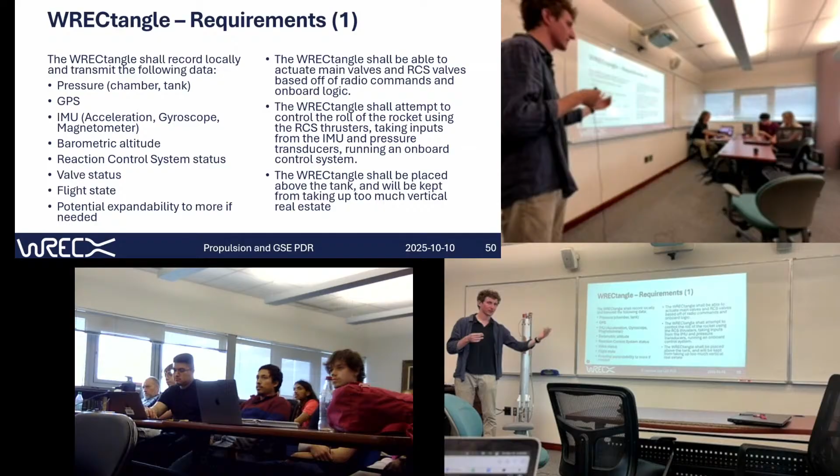Another page of requirements, wall of text, I apologize. But more requirements are things like actually being able to communicate via radio. So we'll have a ground station via a laptop or Raspberry Pi, whatever we like, some sort of computer that we can use radio to communicate remotely.

We want it to have a long battery life, but it will also be connected to ground power while we're at the site, because sometimes we have to wait a while for maybe another team, maybe we need to do some fixing, maybe whatever happens. And so we'll be able to have some sort of quick disconnect for power to keep the batteries topped off. Meanwhile, while we go up, it'll log and record the flight data and keep that on for a while. So maybe while we approach the rocket, we can verify everything is dead pressure-wise.

Otherwise, what else we got here? Remote commands for starting on more cameras, which is more straightforward, which we can worry about later. Otherwise, that is it for this page. Let me describe some of the components that we have.

So for starters, LiPo battery. We haven't picked a cell count yet, but somewhere in the range of 1 to 3S. I'm leaning towards 3S because our onboard pressure transducers like a supply of between 9 to 12 volts-ish to be good reading. For our main microcontroller, we've decided to use the STM32, which has a lot of I/O and is very programmable, similar to Arduino, Raspberry Pi.

Radio link we're going to use. We haven't finalized this one yet because there's a lot of various factors to consider with a radio system. But we're planning to use something similar, if not the RFD900x, which is a 1 watt model, which is approaching the legal limits of what we can do without a ham license. And that will communicate with, depending on our antenna setup, could give us maybe up to 40 kilometers range, which would be great to have actual remote data while we're still in the air.

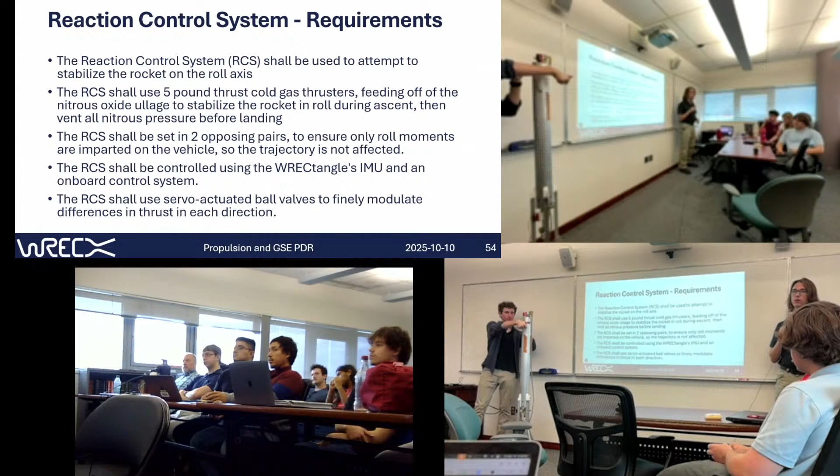It will be controlled by two opposing pairs so that you don't have a pitch or yaw moment develop, only roll, which means the trajectory of the rocket is not affected. I should have moved to this slide earlier. Well, you know this.

So these are two prototypes. Version 1 is a 50 pound thruster. Turns out 50 pounds is way more than you need, so we downsized to 5 pounds.

This is a 1/4 NPT cap, costs $2 on McMaster-Carr. It comes with this hole drilled in it, so we just have to drill that hole and it becomes a thruster.

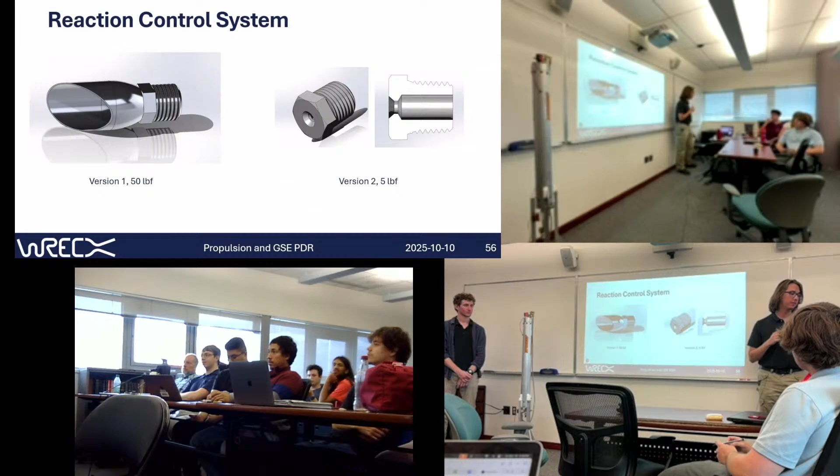This is the last slide I have about the reaction control system. There's a lot more development yet to be done, but again, I must insist, it is not a critical system of the rocket. It is just an extended development for us that we hopefully should have the time and money for. So, any questions? I didn't cover it very deeply, but ask away.

So like, assuming the rocket is still spinning after the initial 8-second burn, would this have enough fuel to stabilize after the 8 seconds?

Yes, so I assume it doesn't. This is sort of a concern about the design that you brought up. This works off of the nitrous oxide gas in the tank, which there will always be some nitrous oxide gas during the burn, but there wouldn't necessarily be nitrous gas after the burn because it would all go out at the end of it.

So in principle, for this to work also during the coast of the rocket, you have to shut the main valves, which is probably one of the sketchiest things you can do, because that means you have the risk of a closed pressure vessel upon the rocket landing, which makes it more dangerous to approach.

We will have lots of ways to monitor this. And ideally, under the programming, the reaction control thrusters open and they don't close, they only modulate how much they're open. But you can never guarantee these things.

So there will be proper safety procedures and proper edge cases coded for how this will work. And hopefully it will also be redundant. If one of the thrusters fails open, it will just spin the rocket and eventually drain all the pressure, and then it will be fine. But yes, that is a good point.

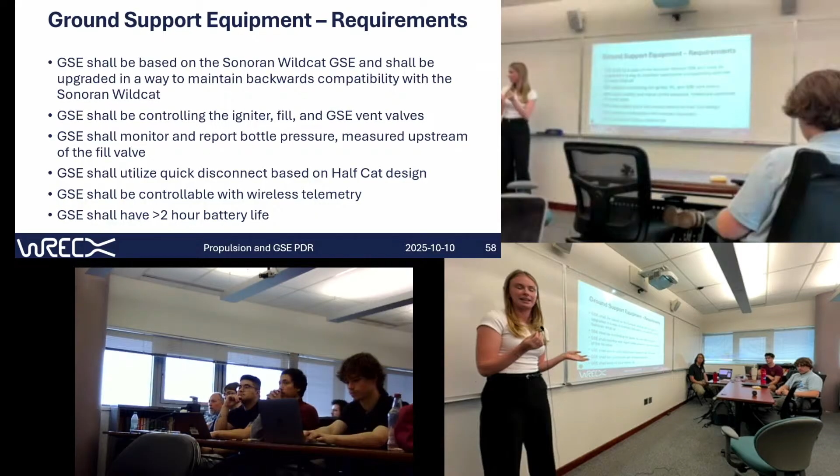So I'll start with the wireless telemetry. Right now we're using an RC controller to control our valves. We're eventually going to change it and use a graphical interface on a Raspberry Pi, so we can just click buttons. This will hopefully solve some problems, like we've had failed static fires where we didn't realize we had to offset throttle and ignition, we did it at the same time and it ended up not lighting, so we realized we have to offset them a little bit, which is pressure for the person doing that.

So if we have something like this, we could maybe program it so that it does that for us, so we don't have to worry about stuff like that. We could also have our pressure data on there, so it can tell us when it's ready to be fired, all that kind of stuff, and just make it look nicer. We have a whole RC controller for just a couple switches, so now we might not need to use that, and it's technically all ours.

And for monitoring and reporting our bottle pressure, we have a whole data acquisition setup right now with our electronics, and we're currently upgrading that, just making it better, making it work more reliably. So I guess go to the next slide.

The biggest change we've been working on right now is this PCB design over the summer. There's a few goals in mind: organization, and solving problems within what we have. For organization, we have a lot of terminals and things, so we can see much easier where things are, if things are disconnected. We used to have a lot of wires, very long, and it was sometimes hard to tell if they were disconnected on purpose or not.

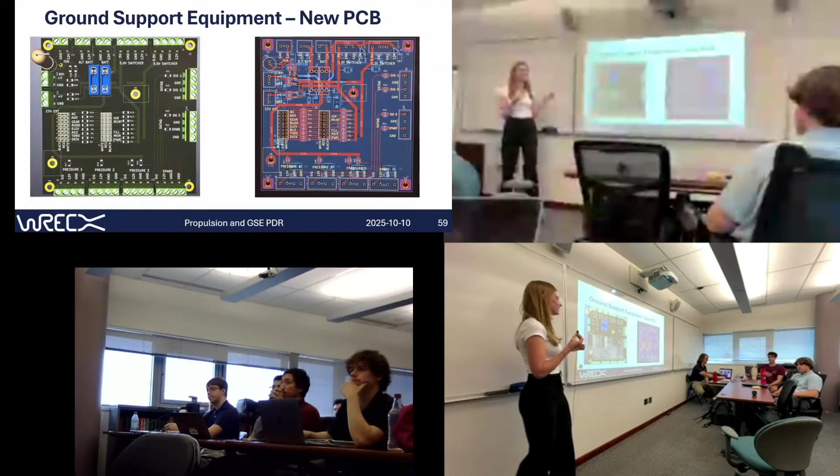There's another couple things this PCB will do. For example, our receiver provides power to all our servos and our relay, which is not great because it's a very thin wire, only one thin wire supplies all the power, which could be a risk if we're using multiple servos at the same time. There could be a voltage drop, and our servos might not react as quickly as we need them to.

So the solution for this is we have our receiver connected onto these pins, and then it sends the signal to these pins, but the power actually comes from here. So we can have the power from here, but the signal from here. Then we have all the other components connected on there, so we have a really reliable power source, and we have fuses and diodes on here to prevent damage to the board and other electronics.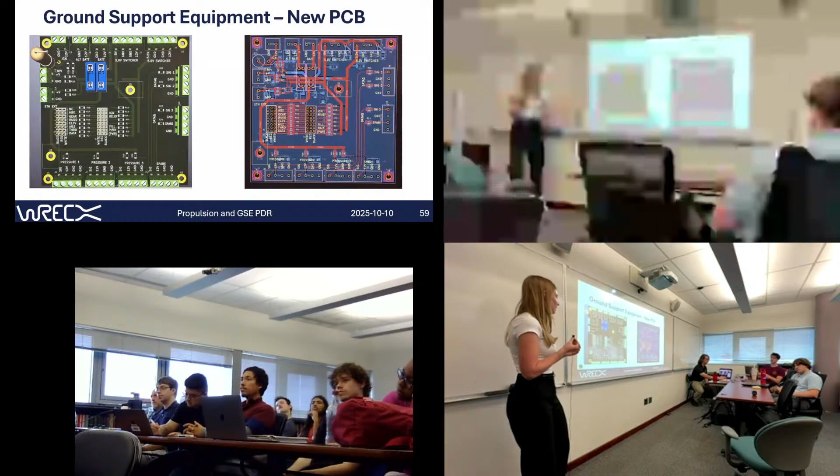This also eliminates the need for repetitive use of components. We used to have a lot of extra stuff going on, mostly because we were just upgrading things as we went last year, so there were things in the original design we didn't use anyway. For example, we had 5 voltage regulators, and 2 of them did the exact same thing. For this design we only need 2 - one runs 5 volts. Anyways, it just organizes everything.

Also some cool fun upgrades - for pressure transducer cables, instead of having them directly screwed into our DAQ and having them rip at the terminals all the time with a big risk of falling out or wires breaking, we have a connector where we solder onto little connector pieces that screw in here, and from the PCB design it connects there so data can go through. This lets us store the pressure transducer cables separately with less risk of damage in the box from extra materials.

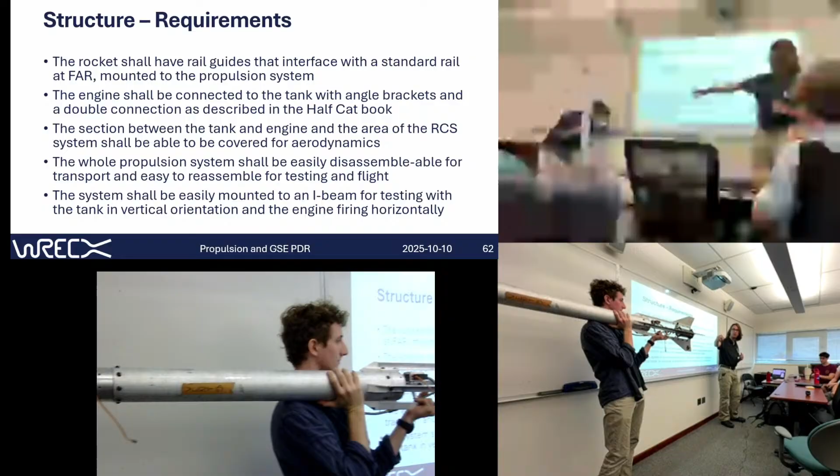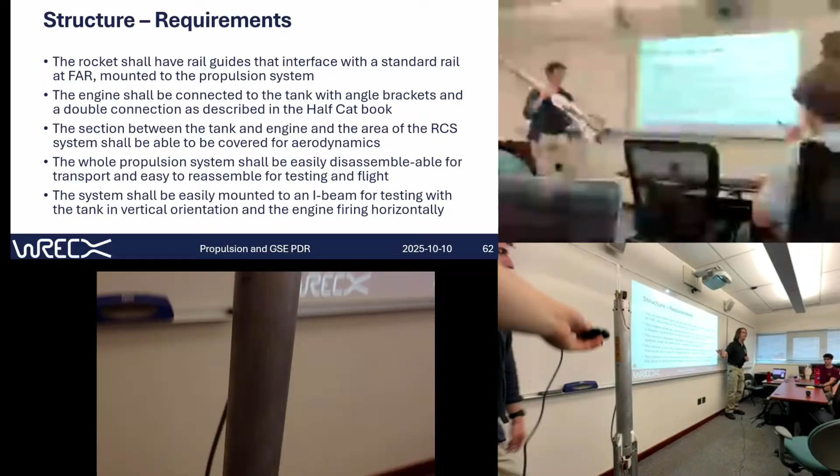We want to design from the beginning the ability to cover it for aerodynamics, because it's free extra performance if you can do that. And we also require that it's easy to disassemble, specifically taking the engine section off of the tank, because the tank is the longest part of the rocket by far. And so it's just a logistics thing to transport.

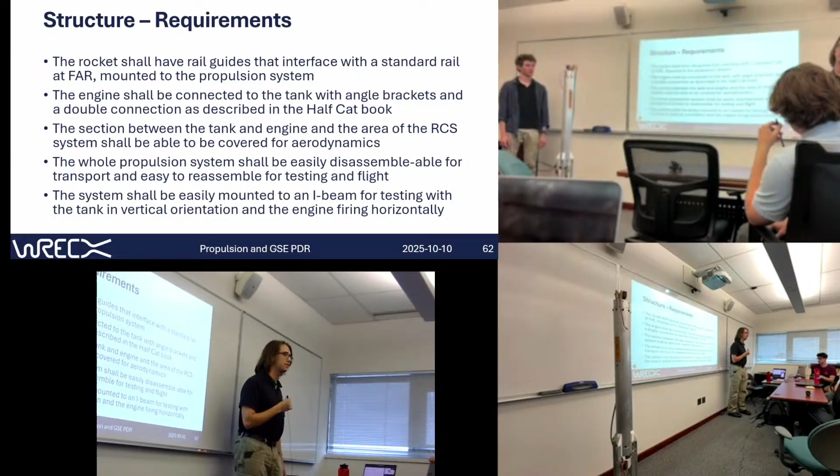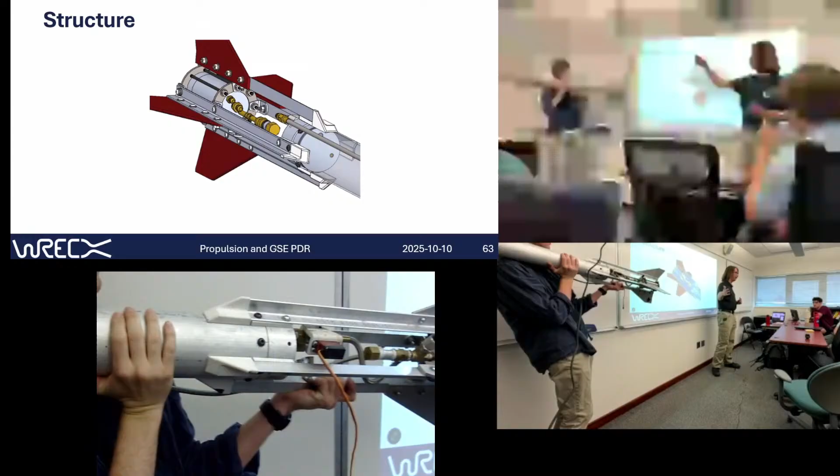This slide is now sort of redundant because we have the rocket in front of us, but this is what we're talking about. You see these L brackets here that connect with two bolts to the tank, and there's space among that for pipes and for pressure transducers and valves, things of that nature, and then it bolts to the engine. All right. Any questions?

For the space, will you still cover the space or keep it just as it is? Hopefully we'll cover it. We want to, from the beginning, make sure it's possible to be covered. As you can see right now, there's a lot of things that kind of stick out and make it a pain, but we want to think of that.

I guess two things to ask. The cover would have to be metal, right? Maybe. We don't want it to collapse on itself. The cover won't be structural. It'll just be for aerodynamics, in which case it could be 3D printed, but the engine might get hot enough to make that a problem. If not, we can do composites. We have unlocked making our own composites now, which will happen in the recovery review.

So yeah, we got options. I was gonna ask pretty much the same question, could it be aluminum? It'll probably be aluminum, or something like a fiberglass shell, or carbon fiber. I know that's ridiculously expensive. The shell could be 3D printed or it could be fiberglass. I think those are the two most likely.

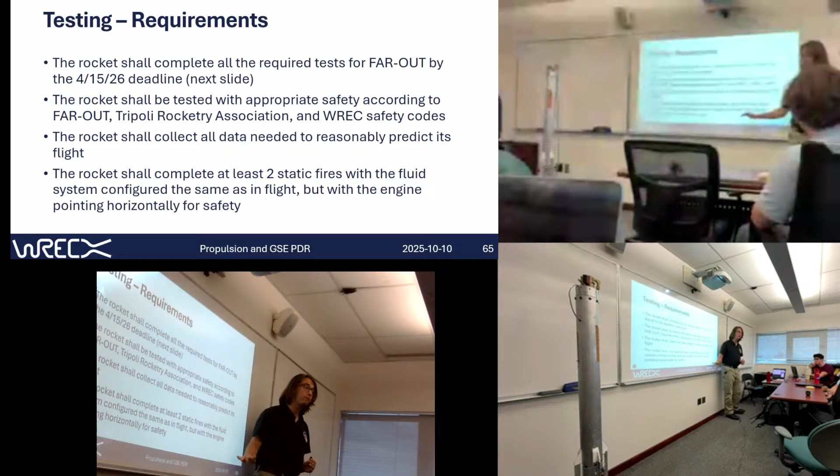Problem is, static fires are expensive. For the consumable cost of nitrous oxide, we expect to consume about 56 pounds of nitrous oxide per firing, maybe more. And at the local rates, a pound of nitrous oxide is $11. So it adds up fast. Yeah. It's also, of course, expensive in effort in getting it to work.

So here's the different tests we do. Pressure proof test. This is the most preliminary test, where all of the pressure vessels we build are sealed, filled with water, and pressurized to 1.5 times the maximum expected operating pressure. We use water because water is incompressible and in general will not explode if the tank were to fail, as opposed to nitrous oxide, which would go crazy if the tank failed. Or even CO2.

CO2 is often used as an analog for nitrous oxide because it has similar vapor pressure curves and everything, but it's not an oxidizer, so it's a little safer. Anyways, injector flow test. This is actually probably one of the safest tests we have to do because it only involves water at low-ish pressures. I think it's pressures you could get from having a bucket with a hose going down and holding it at the top of a building or bridge.

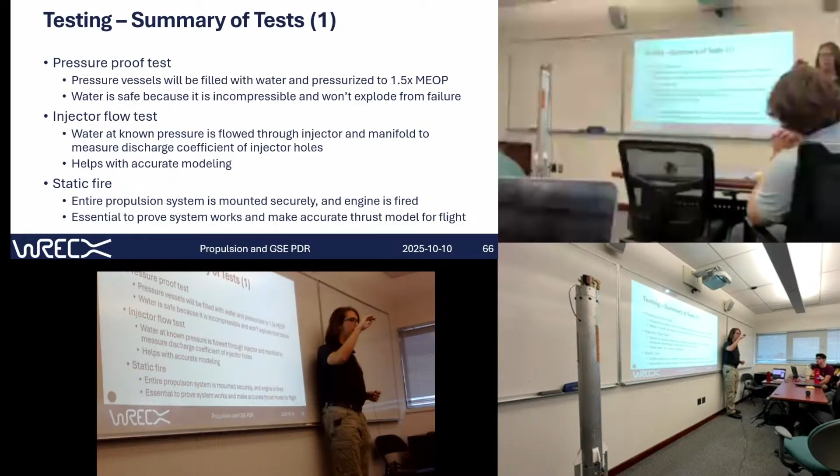But basically, the idea is we hook up water to the injector, measure the pressure in the manifold of the injector, and then let water flow through for a set amount of time. So we know what the water flow rate is through the injector, and that allows us to know what the discharge coefficient of the injector holes is.

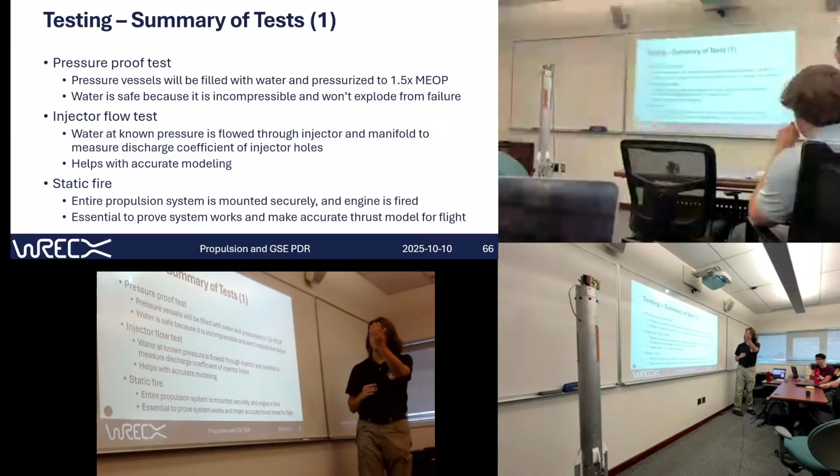Also, static fire, the most fun kind of test other than launch. The entire propulsion system is set up as it would be for flight, with a few changes like mounting the engine horizontally so it doesn't pick up a lot of dust. And we have an I-beam, so going horizontally on an I-beam makes a lot of sense. It's an all-up test of the entire propulsion system.

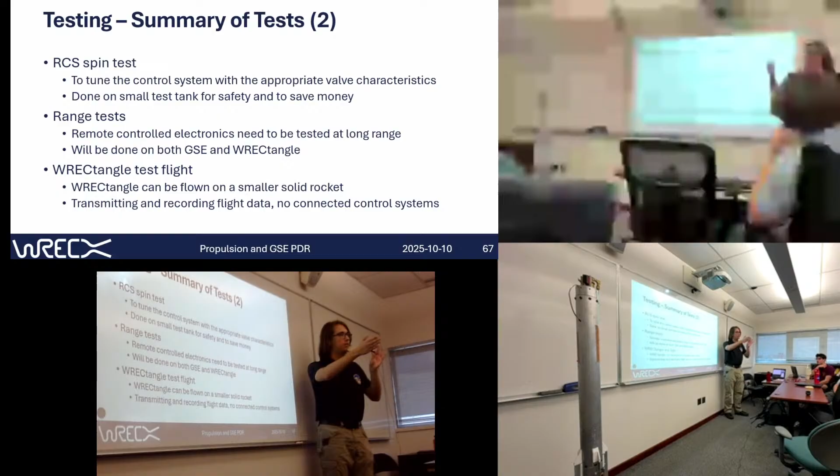Reaction control spin test. This will also be interesting. We'll use a small version of the tank, probably the version we do the pressure proof test on, and we will hook up the RCS thrusters and the entire forward bulkhead assembly with thrusters and the avionics, and we fill it up with nitrous oxide and just play with the valves and see what the IMU measures for how it rotates. That allows us to characterize what force we're actually getting out of the thrusters. And then we can back out a stronger control system for that.

Range test. This is, oh, I lied. All it involves is all of our radios. We need to make sure they work at long distances, so we go long distance and see if they work. Avionics test flight. This is not a strict requirement, but it would be a good idea, where we have the avionics computer ride on a smaller rocket, like a solid rocket, and it gathers data, transmits to the best of its ability, and we make sure it works.

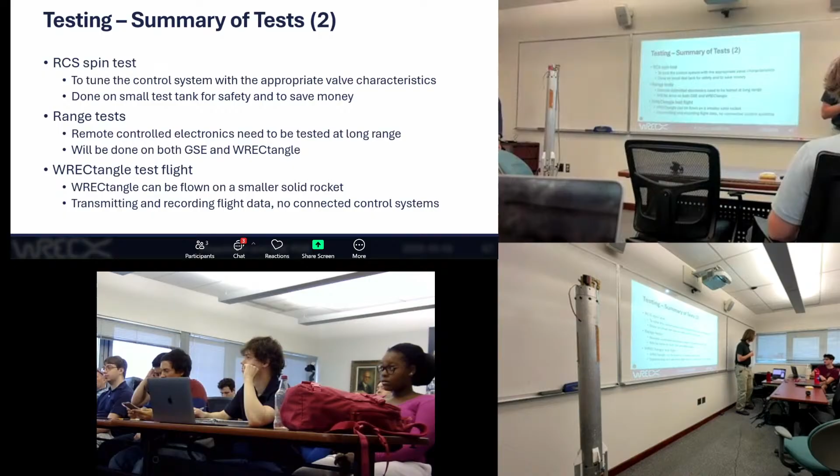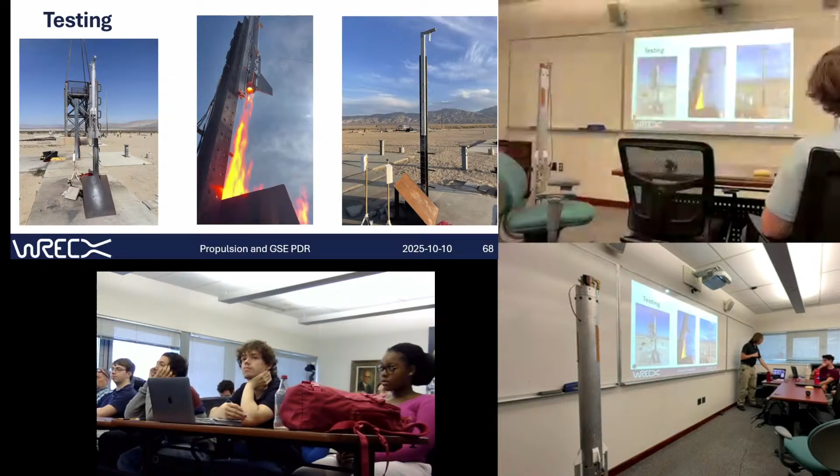This is down in Sahuarita. It's a test site that we just constructed last month, and it's a gigantic I-beam that's concreted into the ground, and it has holes in it that we can mount the rocket to, and we can do test firings. We haven't done any yet, but hopefully we will soon. We're mostly experimenting to source nitrous oxide.

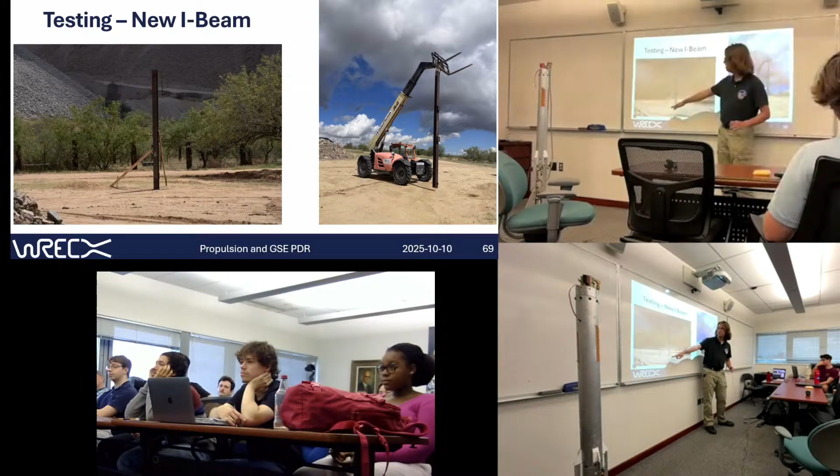So we have fired once at this site, but we haven't fired it on this I-beam. So we know the site is good and the place is fine. A thing I should point out, this frame right here is very compressed. It's a long focal length lens. I took this picture from very far away. You can tell because there's no sky. It's just the mine tailings pile in the background. So this foliage and everything is much further from the I-beam than it looks.

Additionally, the I-beam is oriented towards this pile of rocks down here, which is much bigger than you can see. And since the engine will be firing towards the pile of rocks, in the event that the nozzle blows out or something bad happens to the engine, it will shoot at the pile of rocks, and that will hopefully absorb a lot of the energy rather than shooting into the brush and starting a fire. All right. Any questions?

I'm just curious, if something does go wrong while testing, how hard is it to troubleshoot or maintain the rocket? It really depends on the system. If it's an electrical failure, for example, we have a loss of communications but the system still has power, then depending on how it's configured, it could be a black box, and it could be a situation where you pull the dump valve and figure it out after. If it's something like a leak, we can also halt the pressurization process if we're in the middle of fill, or even before fill.

For our testing campaign in this rocket, we would do a quick little check by just pressurizing the ground support first, and sometimes we would have to go back and double check and fix leaks. Sometimes we would also do that between firings. So it depends, but we have various criteria that we can work around.